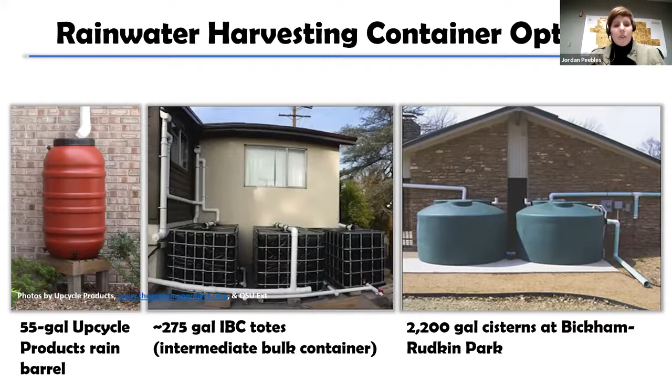So those are some of the options, but for the rest of the talk we're just going to focus on the 55-gallon option. I wanted to go over some of the features of a typical 55-gallon rain barrel, starting at the lid, because that's where the water enters your rain barrel from your gutter system.

With the options the City of Edmond uses, we partnered with a company called Upcycle Products out of Illinois. With their barrels, the lid screws off and on, very easy to remove and maintain your barrel that way. They've drilled several holes through the rain barrel at the top, allowing water to drain in from your downspout or rain chain, however you're directing water into the top of the barrel.

Once you screw off the top, there's an interior screen that keeps out debris and helps reduce mosquitoes from entering your rain barrel. The great thing about the screen is that it's an independent piece. So if something falls in there, or kids are having fun and it gets damaged, you can easily go to your local hardware store, use it as a template, cut a replacement to size, and you're good to go.

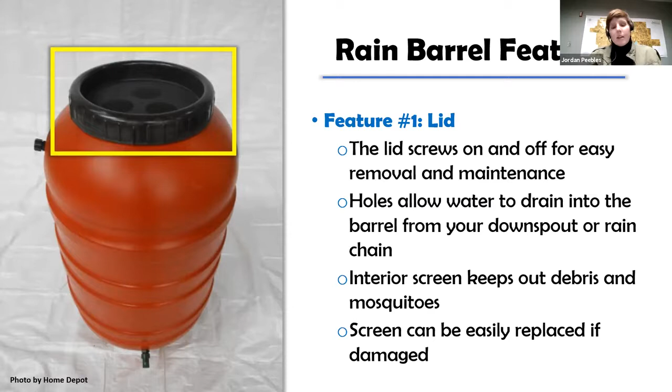The next feature I want to talk about is the overflow fitting. This is really important since it's located at the top of the barrel. As your barrel is filling up, you want to make sure the water level stays below the top of the rain barrel. The overflow will take any excess water, and you can connect a hose to direct it into your garden bed or across your lawn, wherever you want to direct that runoff.

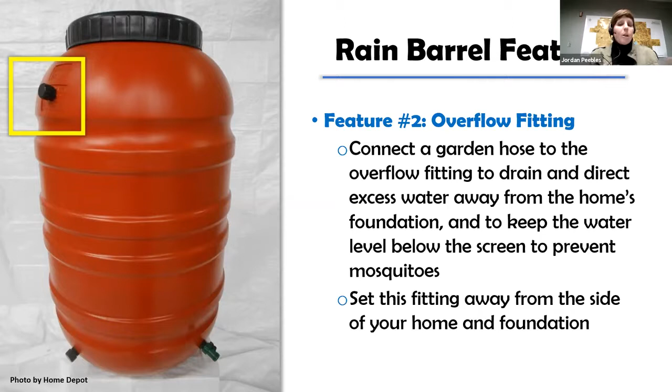But the key is you really want to direct it away from your home's foundation. That's why Upcycle added that fitting to their barrels, to allow you to direct any overflow away from your home's foundation.

The next feature is the linking hose. As you saw with the cisterns example, there was more than one. This fitting will allow you to connect multiple rain barrels together. Since they're connected at the bottom, they will all fill up together. Some rain barrels have the linking fitting at the top, so one barrel will fill up first and then so on if you connect more than one together. The key with this fixture is when you start thinking about winterizing your rain barrel, you really want to keep this in mind.

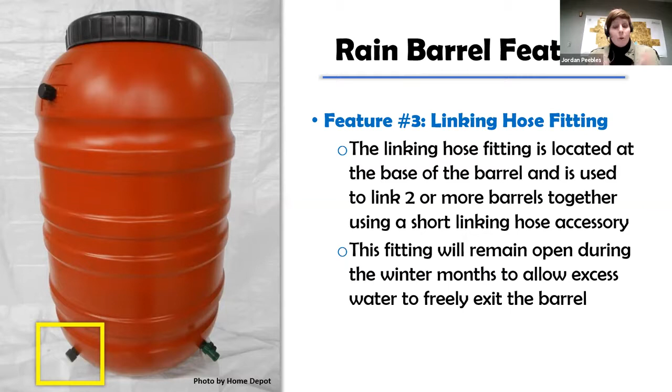This is just a little screw cap on it until you actually connect a hose. But you'll want to keep that screw cap off during the winter, and that will allow water to exit your rain barrel during any storms. If we happen to have a quick freeze one night and you're not really thinking about your rain barrel at the time, the water will be able to exit, and the little water that is left in the barrel will be able to expand without cracking it. That has definitely happened.

The next feature is going to be our ball valve. This is also located at the bottom of your barrel, and you can also connect a garden hose or drip tubing to it. This actually does have an on-off switch, so you just leave it open or closed depending on what you're wanting to work on. A lot of people will turn it on and then forget to turn it back off before the next rain event, and they come out and their rain barrel is empty. So make sure that if you're done using your barrel for the day, you turn that back off. Like the linking fitting, you also want to keep this one open during the winter, so that any accumulated rainfall can exit the barrel without damaging it.

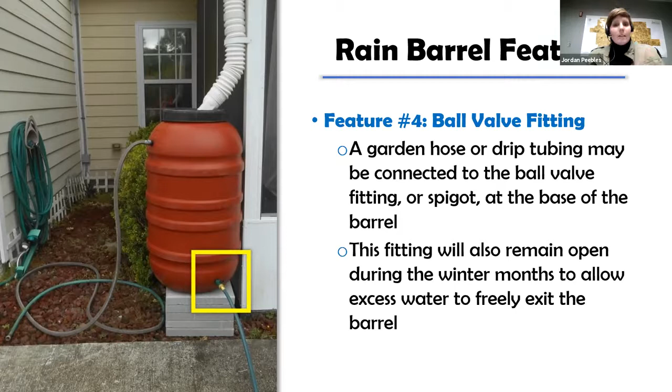Now, with Upcycle's barrels, these are gravity-fed barrels. They do not have an interior pump. So in order for these to really function and for you to get the right head pressure, you'll want to make sure they're raised up on some type of pedestal. The pedestal can be wood, and Upcycle offers a wooden pedestal as part of their available products. For every foot that you raise your rain barrel, you'll get about 0.4 to 0.5 PSI of actual head pressure. As for the base, you can do a lot of different options.

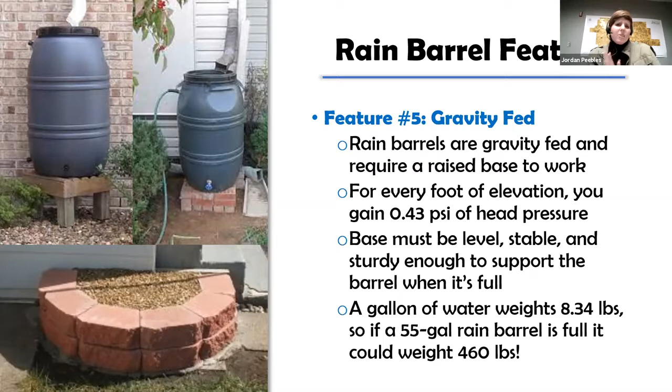It can be wood, decorative pavers, or stone. But the key is that you really want it to be very level, stable, and sturdy enough to support the rain barrel, because when it's full, a rain barrel can weigh anywhere between 400 and 500 pounds. We definitely don't want the rain barrel to fall over on any children playing, on your pet, or you if you're out there working in the yard. So tamp down the ground and really prepare that surface so the rain barrel won't shift and fall over. That can also damage your barrel in the winter if it's starting to freeze—that additional impact when it falls will easily crack it.

Now that we've talked about the features of the rain barrel, we're going to move on and talk about the actual components of a rainwater harvesting system: the steps you take to decide where to place your rain barrel, how to decide the size of it, and how you're going to get the rainwater from your roof to the rain barrel. We'll go over all of those different topics. Just for time, we're going to cover catchment, conveyance, and overflow.

The storage is kind of related to catchment. Once you determine the square footage and how you're going to feed it, that'll help determine your container, so we won't go over that today. Then the outlet, that's really just connecting the hose to the ball valve, or if you want to forget the hose and just use a watering can—that's pretty much what that aspect is talking about.

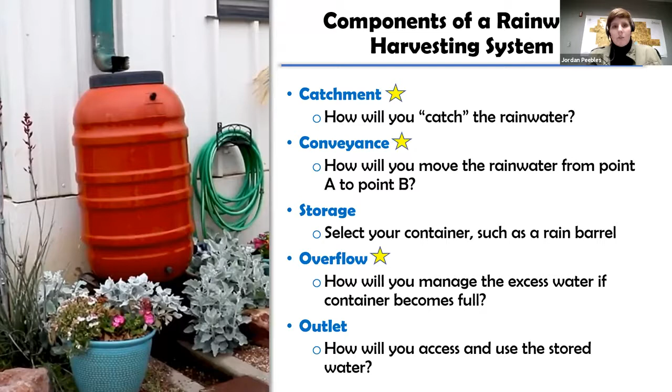So let's talk about catchment first. In the image, that's actually my house, and I wanted to take you guys through a brief calculation, so that you can determine the square footage and how much rainfall that would actually contribute to a rain barrel or two rain barrels.

The equation is just gallons equals 0.6, which is a conversion factor that makes all the units come together, multiplied by the amount of precipitation, and then multiplied again by the square footage of the area.

So we've been talking about 55-gallon rain barrels, and you can see just with one storm how quickly that rain barrel is going to fill up. People are always surprised—you think 55 gallons is a lot, but once you really start doing the calculations, it fills up just like that, and you'll have tons of consistent rain during the rainy season.

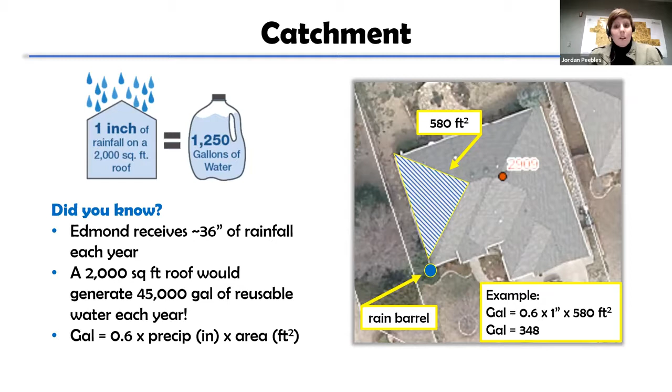So now we're going to move to conveyance. Once you know where on your home you actually want to place your rain barrel, how are you going to get the water there?

Both options require you to cut your downspout. Once you place your rain barrel next to the downspout you want to locate it by, you'll look at the height and cut your downspout at that height, a little bit above your rain barrel, to give you some room to direct your downspout extensions.

Now, if the idea of cutting your gutter makes you nervous, there is another option, called a diverter kit. There are a lot of different diverter options—they sell them on Amazon, or you can find them at Home Depot, Lowe's, or your hardware store.

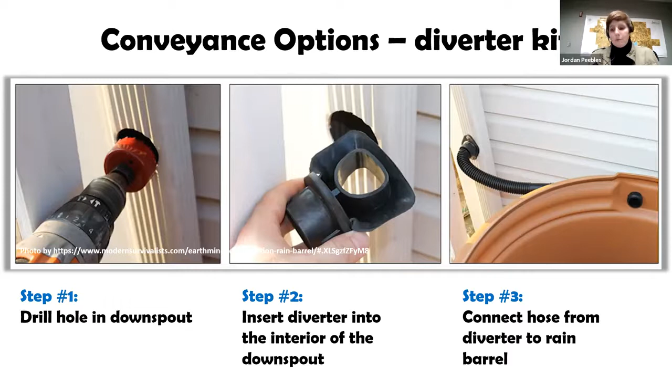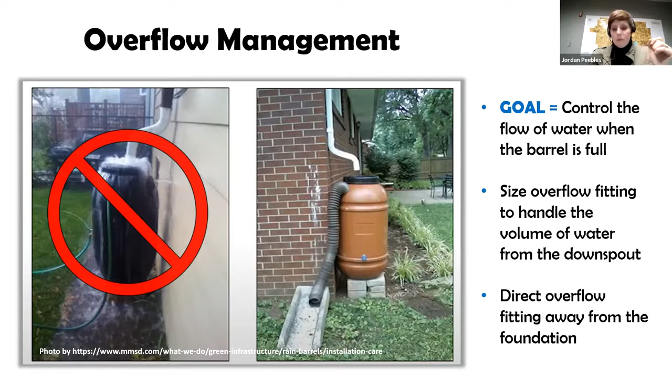So now I wanted to go through a couple of common questions that I get from our residents here in Edmond. We have a lot of different types of communities here, and some homes don't have any gutter systems, but they still want to participate in the program and enjoy a rain barrel. So they ask, well, if I don't have a gutter system, can I still have a rain barrel? And of course you can.

One option you can use is something called a rain chain. You can replace your downspout with a rain chain, even if you already have a gutter system. They work whether you have a gutter system or not, and they help guide rainwater down from your roof edge into a rain barrel.

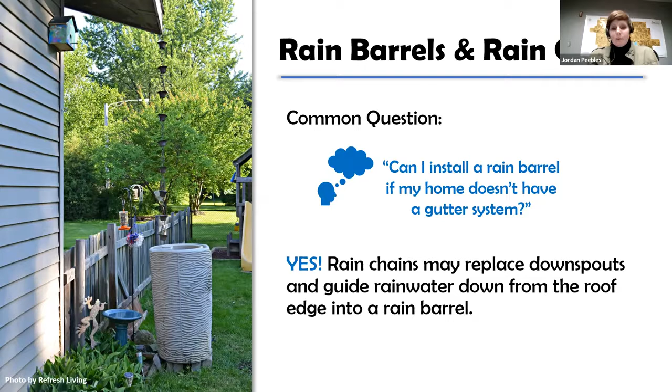There's a couple different options. Rain chains are just a series of connected cups or rings. They come in all kinds of different shapes - tulips, fish, or just simple rings. They can be very simple or very ornate. It just depends.

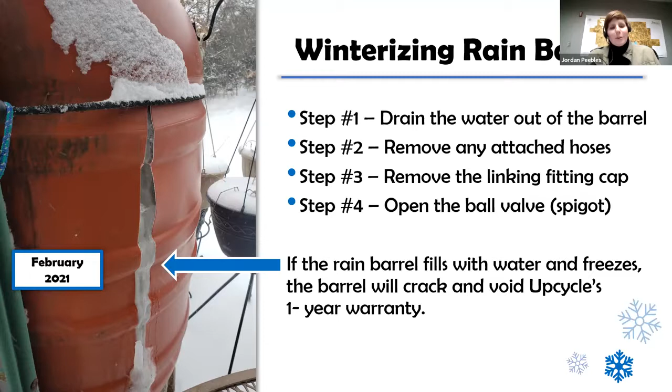With our vendor, Upcycle Products, they do offer a 1-year warranty on their rain barrels, but if the rain barrel isn't properly winterized, it's going to void that warranty. So we're going to make more of an effort to make sure people are aware - don't forget your rain barrel in the wintertime. Make sure you take these steps to protect it.

So we did mention that we do have our annual event every year. We've been doing this since 2016, and we've been working with the same vendor for all 6 years. Our event is coming up in just a couple of weeks, on Saturday, April 24th, from 8 to noon, at our municipal complex at I-35 and Covell Road. The address is 2012 Old Timbers Drive.

We do have a couple of deadlines that will hit before that. Our vendor offers 2 options for ordering your rain barrels. You can have an online option, which is just like checking out on Amazon, and that deadline is Sunday, April 18th. But we also have a mail-in option, where there's an actual form you can print out, make your selections, and send that with your check to Upcycle. They will need to have those forms by Wednesday, April 14th.

We also have a web page that we've developed: edmondok.com/rainbarrels. There's a ton of information on this web page. We have frequently asked questions, which keeps creeping up every year - I think there's like 30 question and answers available there. We have the manuals, we have care and use guides, event information, and a map showing your route for pickup. There are videos, training videos, brochures, even information about composting if you're interested in that. So if you're really interested in picking up a rain barrel this year, make sure you check out the webpage and take a look at all the resources there for you.

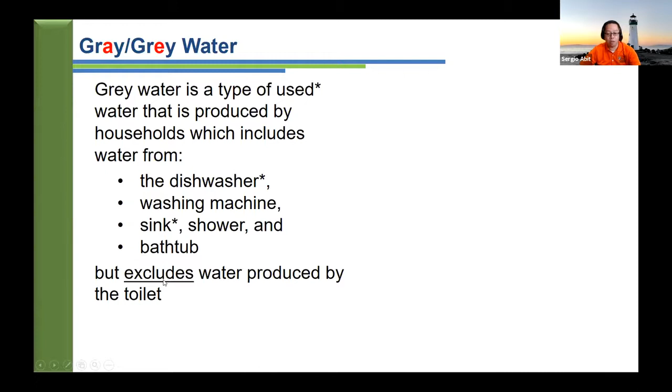So I, as a state specialist for on-site wastewater, actually deal with black water, that's sewage. But there are other kinds of water in our houses: we have clean water that comes from the faucets, from springs, of course. And in the middle, we have gray water, water that is without those very toxic chemicals and is not exposed to human excrement.

Okay, I want to use questions as we move along. So let's ask the next question: how much gray water do we produce, or gray water that we could have reused? It really depends upon what we mean by 'we'. We can look at 'we' as us, homeowners or households, or we can also consider 'we' as the state.

So we'll talk about both. In terms of how much, let's run the numbers here.

For households, the USGS estimates the amount of water used or attributed to each individual in the United States is between 70 to 100 gallons per person per day. We don't always use it directly, but it's embedded in the services and products we enjoy. For this math, I'll use 80 gallons per person per day, at least in Oklahoma.

Let's assume a household of 4 adults, so 80 gallons per person times 4 equals 320 gallons per day. That's a fair estimate of the amount of water used.

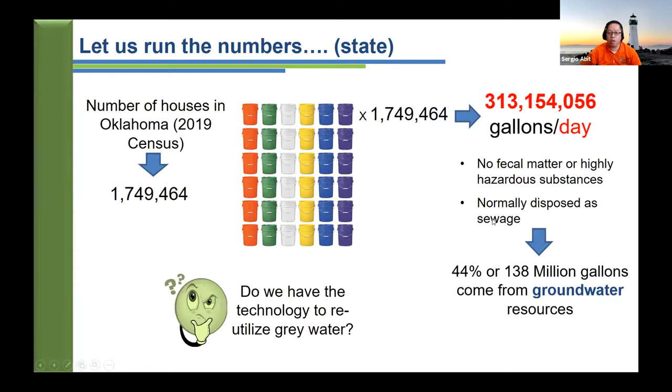So the next question is, do we have the technology to reutilize gray water? Well, we do. Actually, the technology about gray water collection, reuse, and treatment, it's a mature technology.

They're called black water. But the water that comes from our clothes washers, and the sinks, bathroom sinks, and the shower, they could be channeled in a different set of plumbing into a collection tank. A lot of these systems are proprietary. There could be pre-processing within the tank or prior to going into the tank.

And there's also pre-processing or treatment of the water before they are actually dispersed, not disposed, but dispersed into the yard as irrigation water. In some areas, they could even be used to wash cars. Why not? And of course, to flush toilets.

So this is a mature technology. I don't know why for certain the utilization of gray water and the inclusion of this into our plumbing system in houses is not very common, but just to be clear, it's up there.

The water that we're dealing with here is not clean water. I would not refer to it as wastewater. I'm just going to consider that as used water, and I think we should do that. We should not label water that could still be used as wastewater, because there's a negative connotation to waste. It is something that needs to be disposed. Now, used water is something that we could still reuse, and of course, it is something that could just be dispersed.

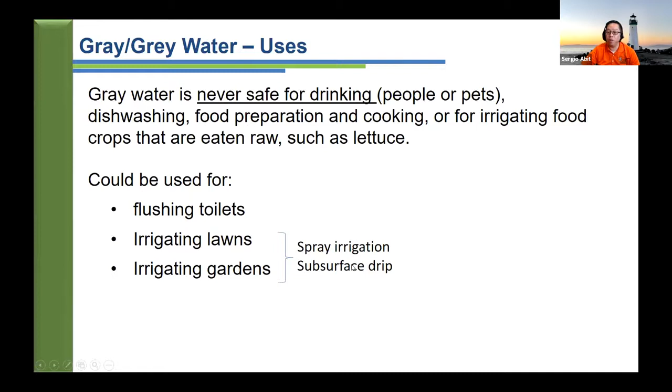It's going to be spring soon, or it is already spring, and we are already thinking of gardens, right? It could be, when dispersed in our lawns and gardens, we could use spray irrigation, just your normal sprinkler irrigation, and we can also use subsurface drip. We probably are all familiar with surface irrigation, we see that a lot in a lot of houses.

But just to show what subsurface drip is, in this picture we have a walkway in the back of a house, and there are areas where they want to put sod or grass. But before they place grass and soil there, they actually have this drip line. Take note of the color of those drip lines, they're actually purple. Those drip lines have holes, and they are pressure-compensated holes, which allow equal distribution of water. So imagine this connected to a gray water system.

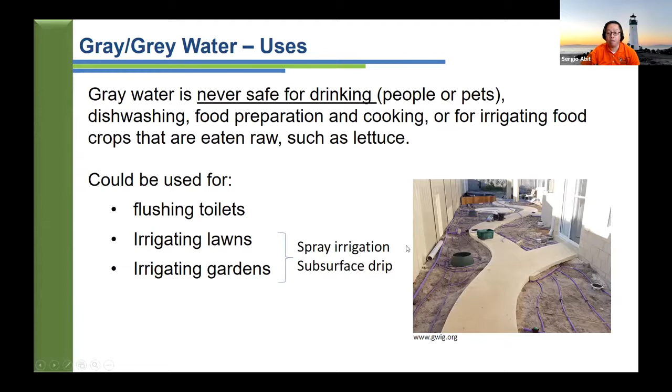All right, why is it not safe? Because it still has contaminants in it. For example, what's in gray water? Well, let's look at the biologicals, organisms that are in it. I want to use this paper by Oteng-Peprah and others in 2018.

They gathered information from various studies on microbes that were reported to be isolated from gray water. There could be fecal coliforms in there. This is water that could come from showers or washers, and it could have some fecal material in it.

Pseudomonas is a fairly common microorganism, but staph, Staphylococcus, is actually pathogenic. Salmonella typhi was also reported in this paper—of course, you will not find this in all gray water, these are just examples of what has been isolated. Salmonella typhi causes typhoid fever. So there are some microorganisms in it.

It is used water, so let's be careful. We need to handle this water properly and carefully because there's some risk associated with exposure to it. That's the biology—let's talk about the chemistry.

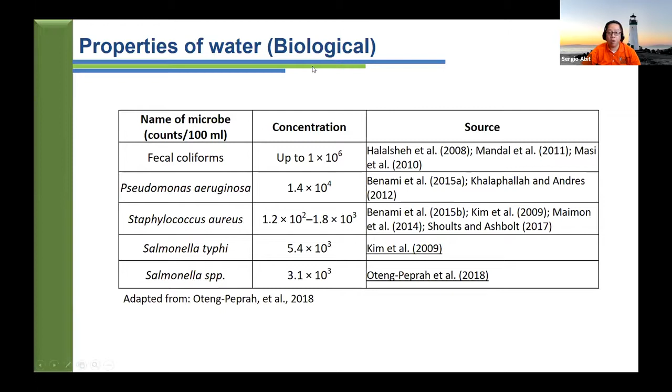These chemistry figures are from the same paper, gathered from across different countries. pH is usually slightly acidic around 6 all the way to slightly basic, but long and short, they're right around circumneutral. Some papers measured electrical conductivity, a measure of salinity—look at that, some are actually saline. I think the borderline for water to become saline is around 30 microsiemens per meter, so this is kind of saline water.

Total suspended solids—there's a lot of suspended solids, right? BOD refers to organics in the water that need to be oxidized by living organisms, so these are organic compounds in them. Some reported chlorine, related to a number of salts.

Of course, oil, and I want to point out nitrate, which is a plant nutrient, a plant-available form of nitrogen. The water quality limit for nitrogen is actually 10 milligrams per liter, or 10 ppm, and for most of it they have exceeded the water quality limit.

Total phosphorus—look at these levels. I think the water quality limit, depending on the purpose, is 0.1 milligrams per liter. So it's not totally clean water. It doesn't have any hazardous or very toxic materials, but there's some in there we need to be careful of.

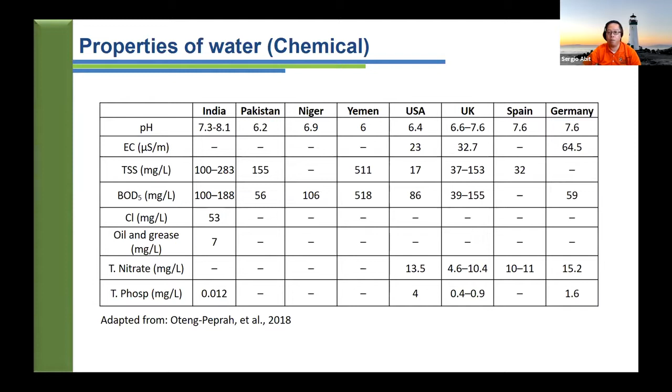Okay, so if this water has some contaminants in it, what can be done to partially treat it before we apply it to our yards, use it to wash cars, or in some instances bring it back to the house to flush toilets?

Treatment of gray water would include flotation and separation of solids. Wastewater would be routed using a plumbing system and goes to a holding tank, where the water is kind of still.

What happens is that less dense material floats, which would include grease and oils, and solids would float too. Of course, the heavier substances sink—sedimentation. After that, you have the effluents that float at the top, the sediments or solids at the bottom, and the effluent, the used water, around the middle.

In some technologies and companies that install this, they route it through a filtering system. Sand filters are very common, or they can use synthetic or organic filters. An example of an organic filter would be wood chips.

If the water is brought back into the house or surface applied, it needs to be disinfected. I'm borrowing regulations in Oklahoma related to on-site septic systems—if it's sprayed on the surface, it's prudent that it has to be disinfected, or if brought back to the house, it has to be disinfected.

Common disinfection methods include chlorination and UV disinfection. These are mature technologies as well. Again, if they're brought to the house or surface applied, they have to be disinfected.

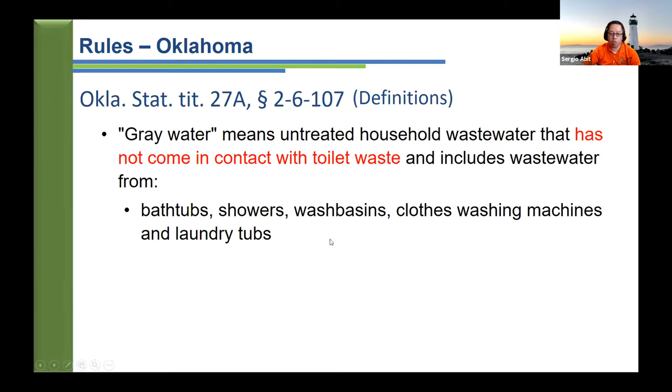Is that all? Of course not. Because untreated municipal wastewater is limited to wastewater captured from splash pads—we have a lot of that, and they're used in the summer, kids love to play in it—so water from municipal splash pads and water used by fire departments for cleaning equipment and vehicles, which could be quite substantial.

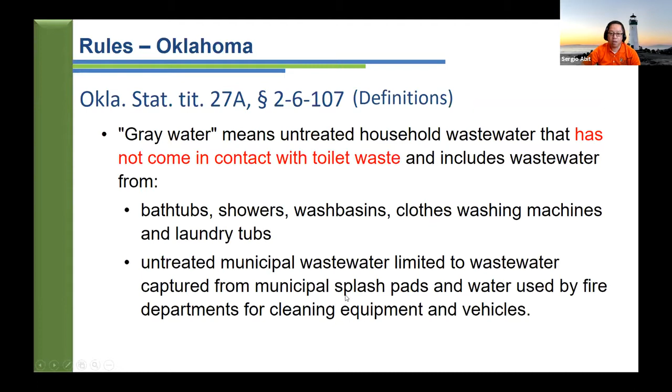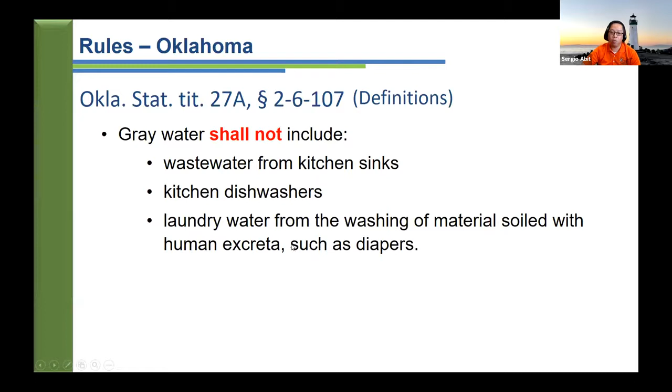So if these are included in our definition of gray water, what is not included? The following shall not be included: wastewater from kitchen sinks, kitchen dishwashers—not included in the definition for the state of Oklahoma—and laundry water from the washing of materials soiled with human excreta, such as diapers. So that's our definitions.

The question is, what other conditions would allow the use of gray water without a permit? Let's go to statute 108. It says the DEQ shall not require a permit for applying less than 250 gallons per day of private residential gray water originating from residences for the following uses: household gardening, composting, and landscape irrigation, provided that the resident provides an overflow into the sewer system or on-site wastewater treatment and disposal.

What do we mean by this? If a house is producing 250 gallons or less of gray water, and it has an overflow system, then they don't have to get a permit from DEQ.

There could be instances where the water couldn't be applied in the yard because maybe it's raining or something, but the house produces gray water every day. So if it cannot be disposed of outside, according to the rule, it has to have an overflow of the excess gray water to the sewer system.

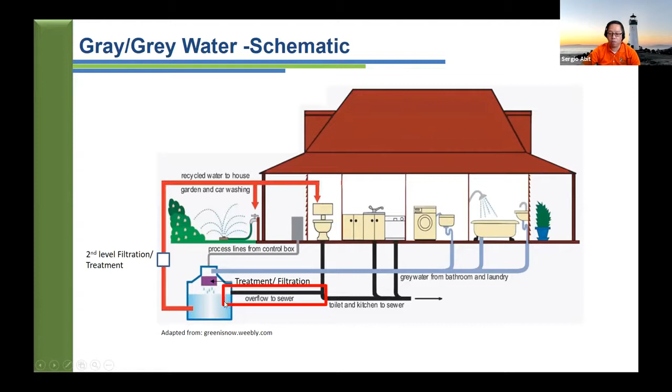What else? The gray water storage tank must be covered to restrict access and eliminate habitat for mosquitoes and other vectors—I think that's self-explanatory. A gray water system is sited outside of the floodway, so you might want to ask your city engineer's office or zoning office to know whether your yard or where you want to dispose of gray water is within the floodway.

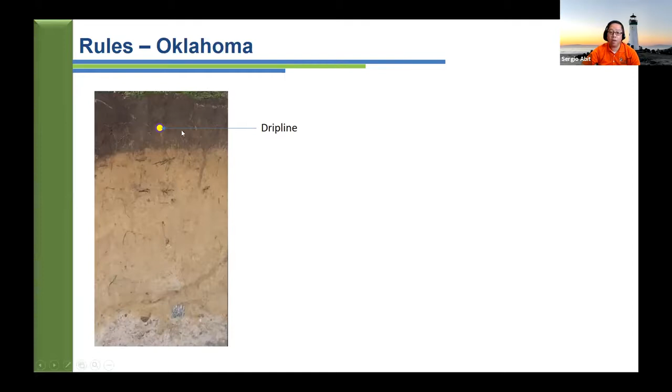So if this is a cross-section of your soil, that's the surface, and here is the parent material of your soil. If you have, for example, drip lines—colored purple—and you're producing less than 250 gallons of wastewater, and that drip line is at least 5 feet in vertical distance to the seasonal high water table, then no permit is needed.

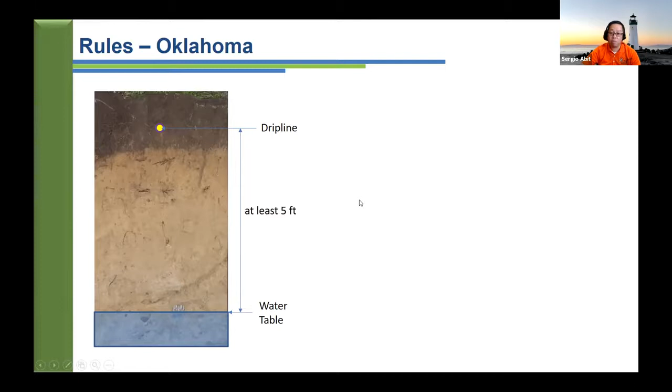And also about pipes—have you seen purple pipes? Purple drip lines, such as this. It means that the water passing through it is non-potable water. They're actually wastewater.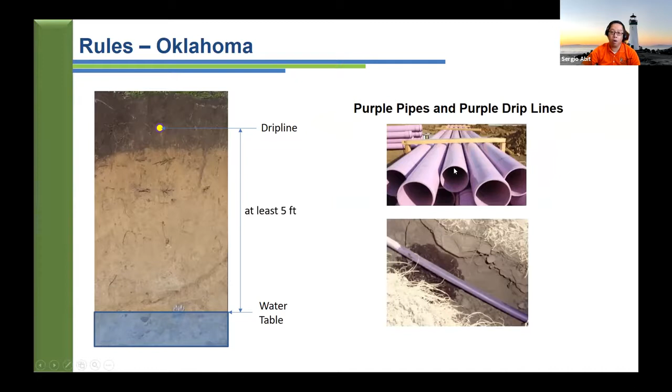Number 6, we have I guess 12 of these, so we've got to hurry up. Gray water is used on the site where it is generated and does not run off property lines. So you cannot just make arrangements with your neighbor to use the gray water on their property—it has to stay within the site or property where it's generated.

It must be applied in a manner that minimizes the potential for contact with people and domestic pets. Again, there are going to be contaminants in this water, so we've got to be careful.

Ponding is prohibited. So ponding would be prohibited if what? We actually regulate the application of the gray water in our backyards. So the properties of the soil play a part. The area of your backyard where you apply gray water would play a significant role in prohibiting or preventing ponding.

Gray water is not sprayed. It cannot be sprayed, right? So if it says it cannot be sprayed, that means if you want to spray it, you need a permit. Number 10, not discharged to a waterway.

That makes sense, right? Self-explanatory and important, by the way. Number 11, used within municipalities or counties that comply with all applicable ordinances enacted pursuant to law. And lastly, a gray water storage system which complies with the provisions of the law.

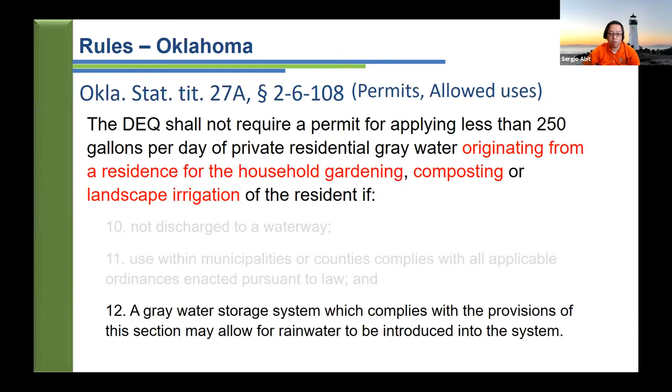So, long and short, it's allowed in Oklahoma. We have certain rules that govern it. So let's be familiar with the laws first and make inquiries in our towns, municipalities, and counties if we have certain regulations that govern the use and distribution of gray water.

Some take-home points. I've talked about a lot of things today, but I want to emphasize that reutilizing gray water will save us a lot of water. Based on the math we did earlier, around 180 gallons of gray water per household per day. That's a lot of water.

Second, gray water has chemical and microbial contaminants in it, and we would need to handle it carefully because we don't want to be sick or exposed to these contaminants. Gray water in Oklahoma, at least, includes water from bathtubs, showers, wash basins, clothes washing machines, and laundry tubs, including water from municipal splash pads and water used by fire departments for cleaning equipment.

And just a reminder, there are rules that govern this in the state of Oklahoma. You can Google these statutes: 27A, 2-6-107 and 108. This is my contact information, my first and last name at okstate.edu, or you can use OSU septic water at okstate.edu if we need to continue the conversation after this presentation.

This is the phone number of the Oklahoma DEQ Environmental Complaints and Local Services. I think they are the regulating entity for gray water in the state. With that, I'd like to say thank you, and if there are questions, I'd be glad to address them at this point.